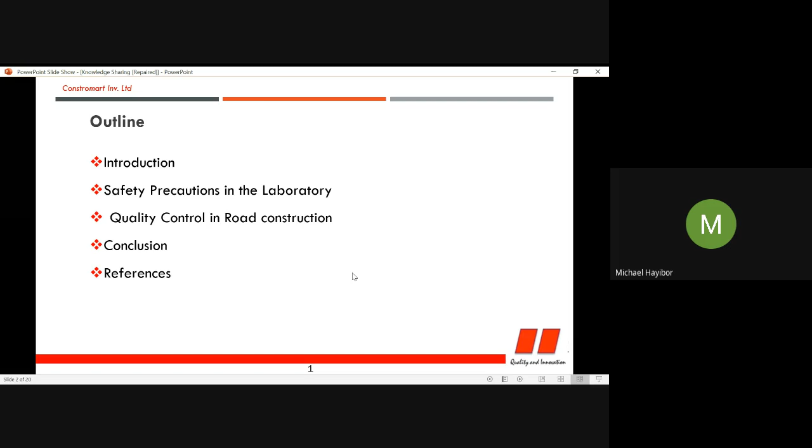Introduction. Materials are the fundamental entities of every structure constructed on site. Anything we see on site, be it culverts, concrete pipes, the GWC layer, anything that constitutes a structure or a component of the road construction, is gotten from materials. This therefore in principle suggests that if a material fails, you can rest assured that anything you are constructing on site will not last.

Therefore it is the responsibility of the lab to test and analyze materials and be sure that only standard, correct or qualified materials are used at every stage in the construction process according to laid down procedures and standards. So quality control simply means ensuring compliance with minimum standards of materials and workmanship to achieve the design performance of the road or facility, road in our case. It is therefore measures put in place to eliminate the risk of non-conforming outcomes. So if you don't want your road to fail, then you have to control, in our case, the materials.

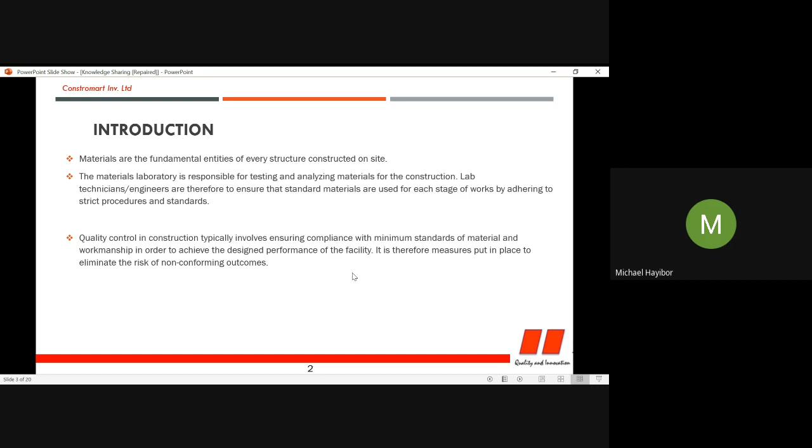So quickly, let's look at some safety precautions in the laboratory. As I said earlier on, whilst we are trying to control quality on site, if you are not healthy or if you are not fully fine, you may not be able to take good control of materials on the site. So first of all, as we are talking of control, you have to control your own safety in the lab to remain sane, to remain healthy, to perform your duties well.

So as much as we want to achieve quality, your own quality, which talks of your health here, your hands, your eyes, your legs, everything. You wouldn't want to come to the lab trying to make sure that the construction is done according to measures and procedures, but at the end you came with 10 fingers and you are going back with 7 fingers. It wouldn't be fine. Or you come and inhale, and at the end you are sick. First of all, prioritize your health so that you'll be able to function well.

So these are a few things, not limited to this, that you wear to protect yourself. Looking at this is a lab attendant in package 3 here. He has his nose mask on, he has his gloves, he has a lab coat, and then his safety boots. So this is the typical dressing of a lab attendant. At each test, you may or may not be required to use some of them, like the gloves. Some tests you may not be able to perform if you are using them.

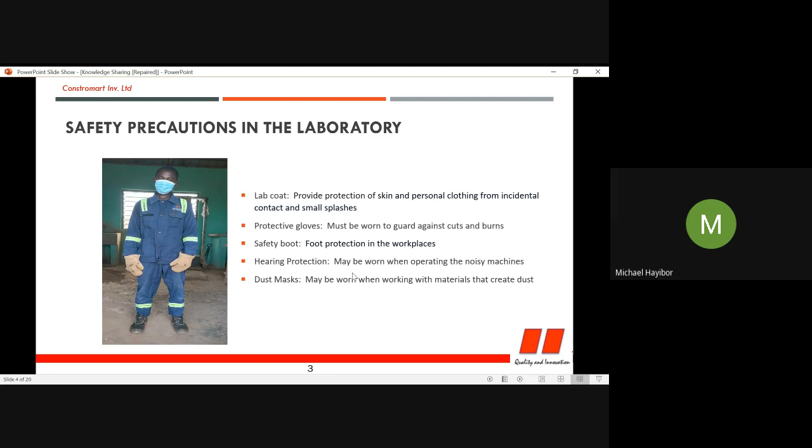Then we also have dust masks or nose masks. Some soils, you work with them, you dry them, and as you work with them, the dust generated is not good for your health. So these are a few things you use to protect yourself depending on the kind of test you do, to be able to remain relevant and do your work as a quality control personnel.

So we now look at quality control in road construction. When we talk of quality control, we can have a variety of things that you do to ensure that there's proper use of materials or proper execution of works in regard to materials, to make sure that your construction is excellent and well qualified. So we can talk of control of materials, where you look at the materials and the test procedure. Every material requires a certain test for you to give it approval to be used on the road, and that test requires a certain procedure that you have to go through.

So you also control the test procedure, how you run the test. Then you look at the frequency and extent of testing. So maybe looking at gravel, or chippings that we use for concrete, standards have been given for you on when and how to do the test. So when do you do the test, or after what amount of material has been used are you required to do another test?

And some to the frequency, then some material can lie down for a lot of time, and where you doubt its quality, you may require to do a test again to see whether it is qualified or not.

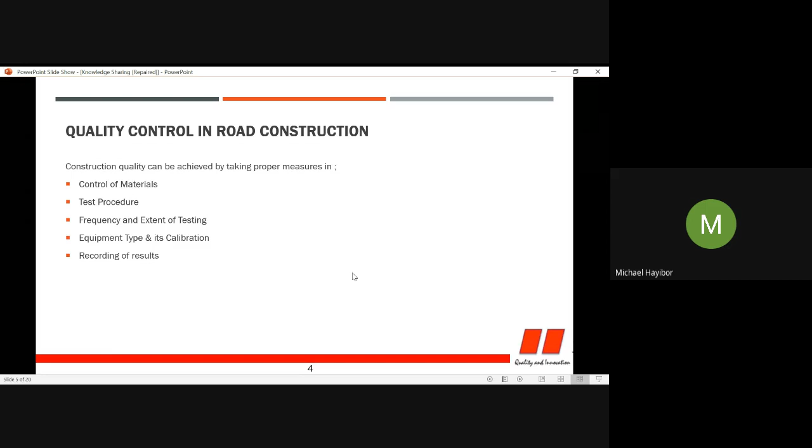So tests might be performed on individual materials. What do we control during road construction? First of all, tests can be performed on individual materials. So you can control individual materials. Tests are there that will be performed to control individual materials like soil, gravel, aggregates, or binder, or something we basically call coater. So it can be an individual material.

You have to also control mixes, gradation of aggregates. Maybe you have combined there is not a single type of aggregate, but a lot of different sizes or different shapes that you have to control, mixed proportions, mixed designs. So concrete, for example, has a lot of components. We have water, we have the sand, we have the...

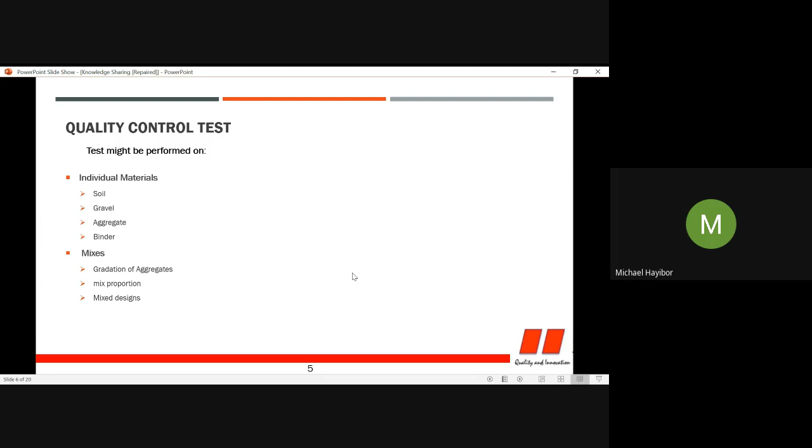to ensure construction quality. Then during construction process, you can also control spreading. Maybe those who have been able to go to package 1, the spreading of chippings after they have put the binder on the road. Looking at the amount that is supposed to be put on the road, at what rate or at what speed should the vehicle move, such that once the chippings come out of the vehicle, being spread on the road, it will be according to what is designed.

Then we also look at controlling temperature, the mixing temperature. What is the temperature, for example, of the binder or the coater? We have standards that are used to control all this. Then spraying, at what rate? Sometimes we go to the road, then we see bleeding, such that the coater or the binder is too much on the road, such that when your car passes on it, it can stick on the tires. So you have to control the spraying to ensure quality.

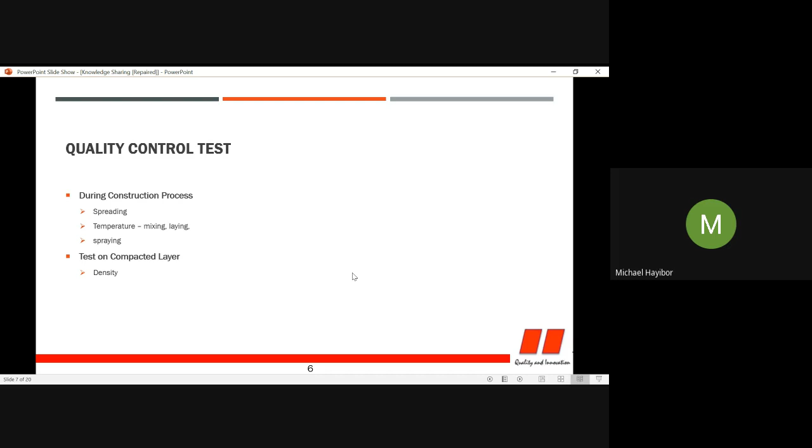Then we can also have tests that can be done on the compacted layer, maybe density, GWC. We all know borrow pit, the material that they bring to the road, they lay to a certain thickness and compact. What test can you perform on it? It is density. So we look at individual materials, we look at mixes, then we look at control during construction process. Then after construction, the compacted layer can also be tested.

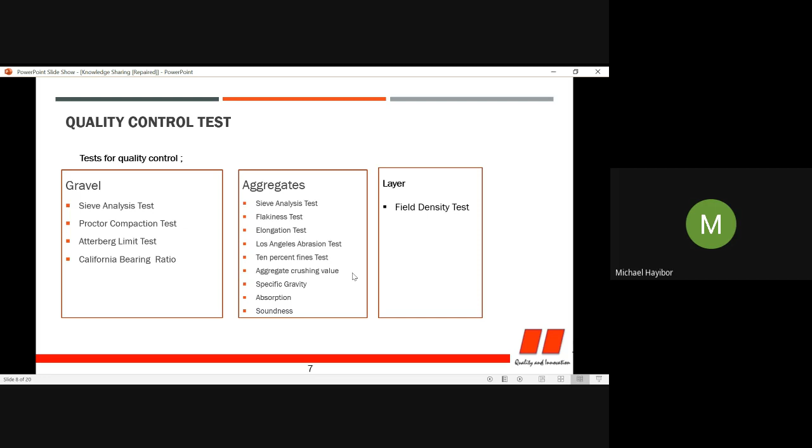So tests for quality control. These are some of the few tests that can be performed on materials on site or in the lab. These are not exhaustive, just a few I have taken for this presentation. So for gravel, we can do sieve analysis test, Proctor compaction test, Atterberg limit test, California bearing ratio. Also with the aggregates, we have this kind of test, then the field density test to see whether it has qualified or not. As we go through, we will look at a few of them and the equipment being used.

So looking at sieve analysis test, the standard that we use to control proper use of materials on site gives us values. When we talk of standards here, mostly what we use to control works or materials on site is basically values. They are limits, maybe let's say 1 to 2 or 2 to 3 and all those things. So we have standards.

In the case of sieve analysis, it is done to determine the particle size distribution of the material. So when you are going to use it for a certain material, you have a standard for it to pass or for you to use it at this stage or for this purpose.

You have a standard that is being used for the gradation or for the sieve analysis. So we use sieves, the equipment, for those processes to perform that test. We have the sieves that we are seeing in the picture. We have the one with the largest aperture at the top, and then the one with the lowest at the bottom.

So you put your material in the upper one, then beside it is the shaker. Using this one, you'll be able to shake it, and then you calculate with standards to see the gradation, how distributed are the materials that you want to use, and you compare with whatever purpose to approve or disapprove the material for use to control your quality.

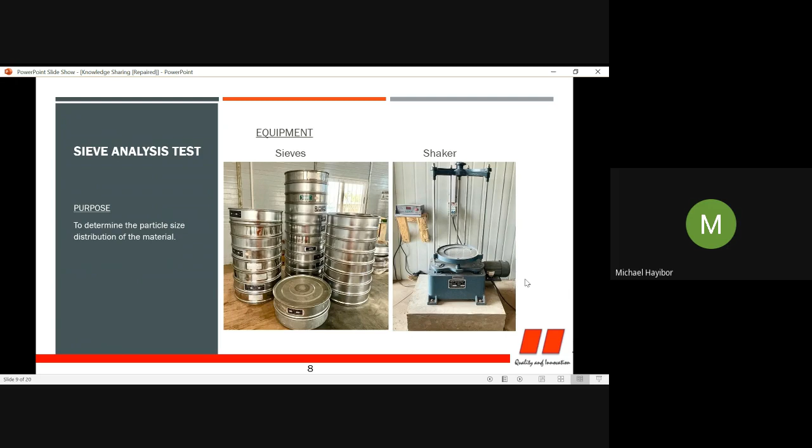So mostly for the next tests that we'll be doing, what we know is that we use standards, and basically they are values. So you do the test, compare with the values or the standards. If it is not qualified, you reject the material. Or if it is not qualified, you look at a different way to solve it, to control your construction on site. So next test is Proctor compaction test.

So this is done to determine optimum moisture content and maximum dry density of the material. We all know that when we talk of moisture content, we are looking at the amount of water in the soil or in the material, in the gravel. So using borrow pit, for example, when you bring it to site, there's a certain level of water that you have to put in the soil so that you'll be able to compact it to a very dense state.

So the Proctor compaction test with calculation will help you determine what amount of water should I add on these materials such that I'll be able to compact it very well. So some materials need very little water, whilst some need a very large amount of water. So when you do this test, you can tell control on site for this material, add more water so that you compact it well, or add little water so that you can compact it well.

And then you look at what is the maximum density that is possible to obtain in the lab, so that you can use it during your field density test to control whether they have compacted it well or not. So the machine here, we have a mechanical one that you can use for compaction. This one helps you to compact your material in different amounts of water, after which you'll be able to determine the optimum one, the one that will give you the best density.

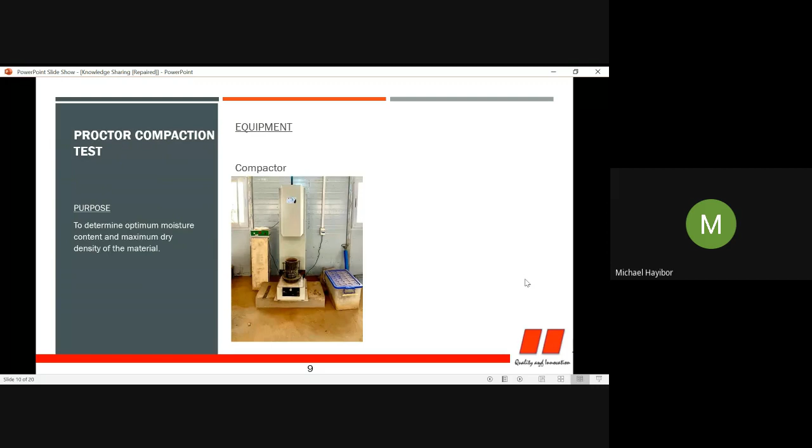So this one is from package 1 at lot 1, sorry. But in package 3 here, where you don't have this machine, you have to compact the material manually. Then we also have the California bearing ratio. So this also determines the strength characteristics of the material. So this is just an extended test on the compaction.

So after you got your amount of water that you need to make a better compaction on site, then you proceed to look at the strength after you have compacted it. California bearing ratio gives you a clue about the strength. So depending on the kind of material you are using, it has a certain minimum strength that it has to meet. Let's say we want a certain strength, say 40. So you use this machine, the California bearing ratio machine, to perform your test and then calculate your strength.

So if you're looking for strength 40, then it means that for your material you should get the minimum strength to be 40. So after going through this test, you are trying to get the strength. So if you're looking for strength 40, you have to get 40 and above. And if it is less than 40, then you will not be able to use that material.

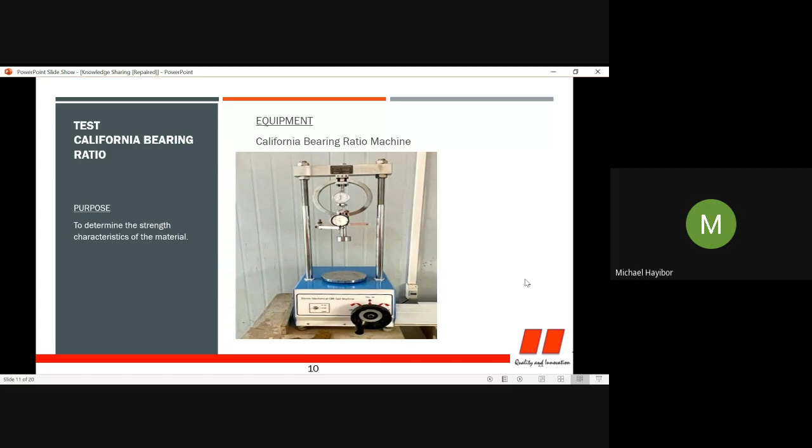Then we also look at Atterberg limits test. So this one determines the liquid limit, plastic limit, and plasticity index. These are all standards in the specifications that we are using. So the liquid limit just talks of the amount of water that you add. This one, you have to use the fine part of the material, borrow pit material.

To determine the liquid limit you use the Casagrande. So it tells us the amount of water that we can add to the fines or to the soil, such that it will just begin to flow as a liquid. And then the plastic limit is also there.

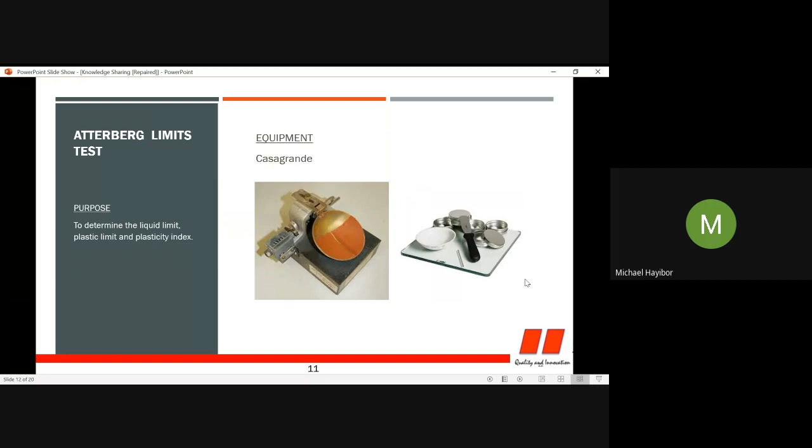And then with the help of the liquid limit and plastic limit, you'll be able to calculate your plasticity index and compare it with standards. You'll be able to know whether or not the material is good to be used on the road.

So we also look at flakiness. So this one measures the strength of aggregates, or chippings, the aggregates that we use in concrete, or let's say basically the stones that we use in concrete. So this gives you an understanding using this flakiness gauge. Also, the standards are there after you have gone through your test, then you compare to see whether to approve

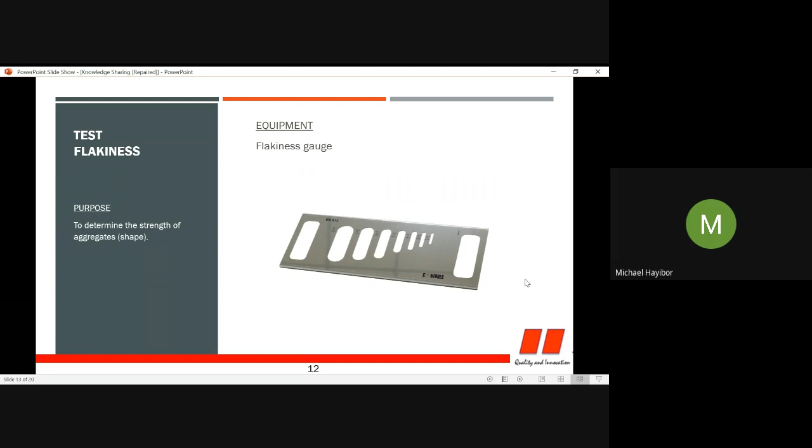or disapprove. So with the flakiness gauge, you try according to the standard to see whether the material will be able to pass through these apertures or not, after which you determine whether it's flaky or not. So if it passes to be used on the road, it's not flaky. But if it doesn't pass, then you say that it's flaky. And flaky materials are not strong and not durable for use on the road. So this flakiness test is used to determine the strength of the material or the shape and size of the material.

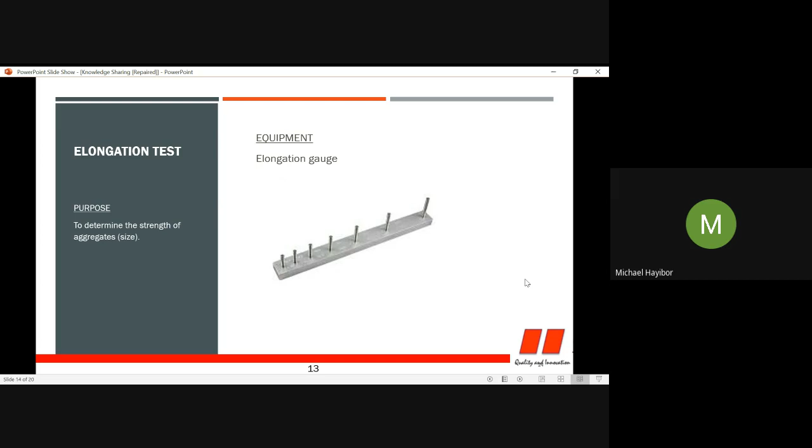We also have elongation, which goes with the flakiness test. Looking at the size, or let's say how long each particle of aggregate that you are using is. You do that, also get your values and compare with standards to know whether to approve it or not.

And we also have the Los Angeles abrasion test. So that one is done to determine the strength of the materials. Also, you are looking at durability or hardness of the material, the ability of the material to resist load or crushing and all that. So this is the LAA machine, or if you want, Los Angeles abrasion machine. This is the machine with the balls here.

You put the material in the machine and then put the balls in it. After a number of revolutions, you will be able to calculate the wear on the material and compare with your standards to control the use of aggregates on site.

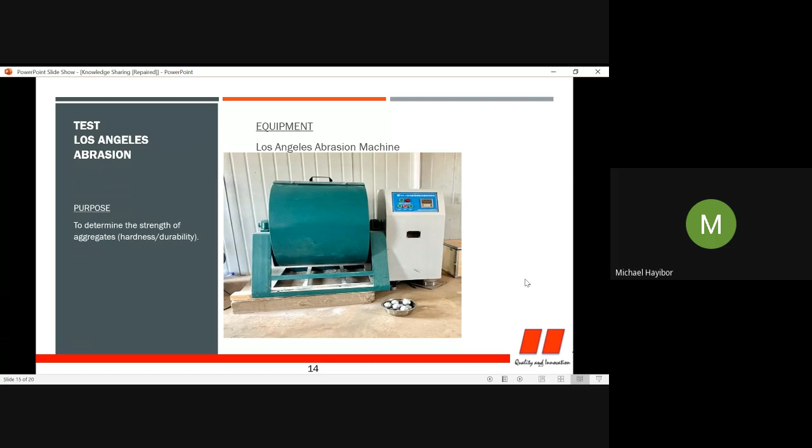Then we also have compressive strength tests. So this tests the performance characteristics of a mixture. So let's take concrete, for example. So if they are casting concrete on site, you take samples with the help of moulds. You take samples and for their specified days, like 7 days and then 28 days, you crush the samples using

this one. So let's say they are constructing U-drains, for example, so as they have started constructing, you take samples. After 7 days, you crush it. You have a certain percentage, say 60%. By 7 days time, the concrete will achieve a certain level of strength. So 60% of the target strength that you are looking for. So let's say you are looking for a strength of 25 Newton per millimeter square. Then you are crushing it to check whether you are getting the required strength or not.

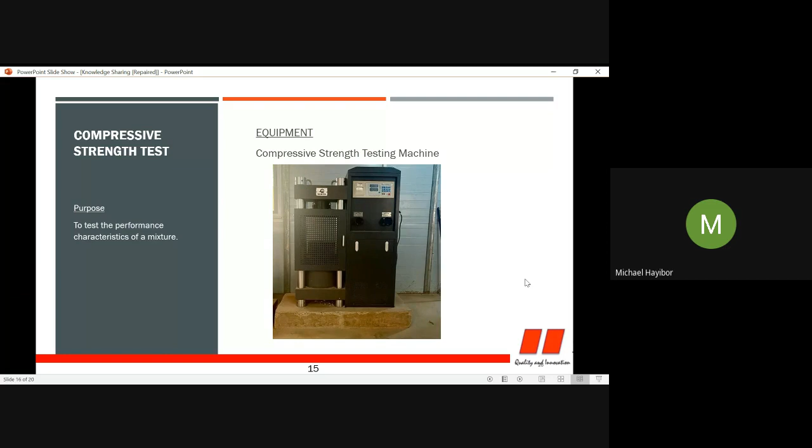If you are getting the required strength, or if it is more than the required strength, very good, they can continue with what they are doing. But if you are getting less than what is required, then you have to prompt them. Maybe you have to go and see what they are doing wrong and correct them, so that you bring them back to the right process.

Then we also have field density tests that we do on a compacted layer. So maybe they have laid a sub base or a base, and you want to see, has the roller passed on the layer enough? Maybe the roller has passed on it 5 times, 6 times. So you want to check, has it passed on it enough? Have we achieved our maximum strength as we did in the lab?

So you compare the results that you have here with that which is achievable in the lab to see the relative compaction achieved in the field. So you also have standards depending on the layer that you are constructing. Some of them, you may have to achieve a certain level, say 93%. Some you may have to achieve 95%. Some you may have to achieve 98% of what you got from the lab. If you get less according to the layer that you are doing, then you have to tell the roller to pass through again. You have to compact again.

Or if maybe, like we checked earlier, the water that you added wasn't enough, then you have to add water again and compact very well until we are able to get a good relative compaction before you can say that the layer has been compacted well.

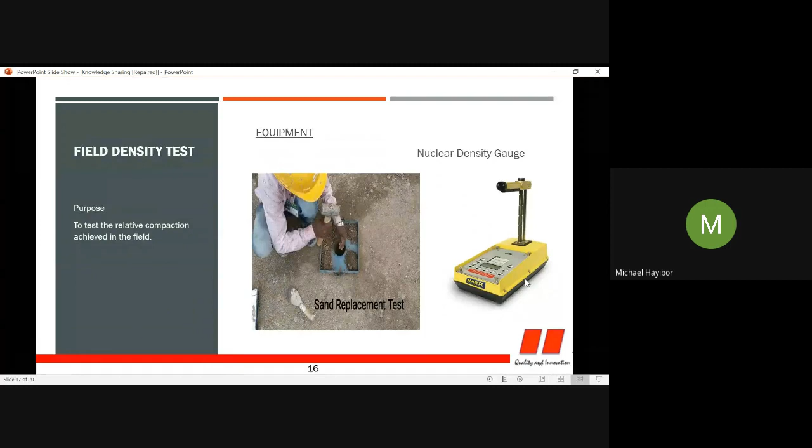But we also have the nuclear density gauge. The technology has advanced such that you can put this one on the layer. It can measure the amount of water in the layer. It can measure the compaction in the layer. Then after which you can proceed to get your relative compaction to know whether or not the compaction was enough.

So in conclusion, we need adequate equipment, adequately trained staff and on-job training that will work collectively to ensure proper quality control and enhance construction quality. In all this that we have spoken about, which is just a section of things done in the lab to control quality on site, you need adequate equipment. If you don't have adequate equipment, we would not be able to achieve all this we have spoken of.

You also need adequately trained staff. Maybe your staff may be trained, but they are not enough. Some of the tests, like the field density test, one person cannot perform it. So if you don't have enough staff to perform it, it may be impossible for you to control works on site.

So as an example, if you go to Yendi, package 1, both lot 1 and 2, although they may also be lacking, they have a good number of staff or workers that are always on the road performing densities to know whether the compaction was okay or not, so that they will lay the next layer on the previous layer.

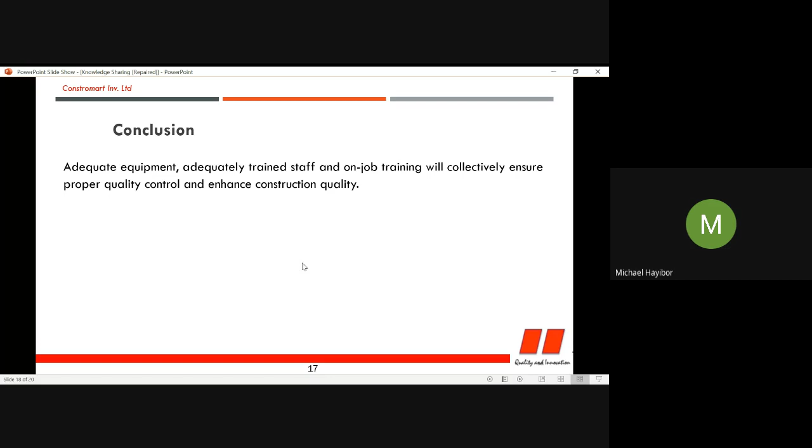Thank you, Emmanuel. Isaac, please, has the question been answered? Yes, please. Thank you. Engineer Melomey, please, you can ask the question. Okay, thank you very much. Good morning, everyone. Emmanuel, thank you for your presentation.

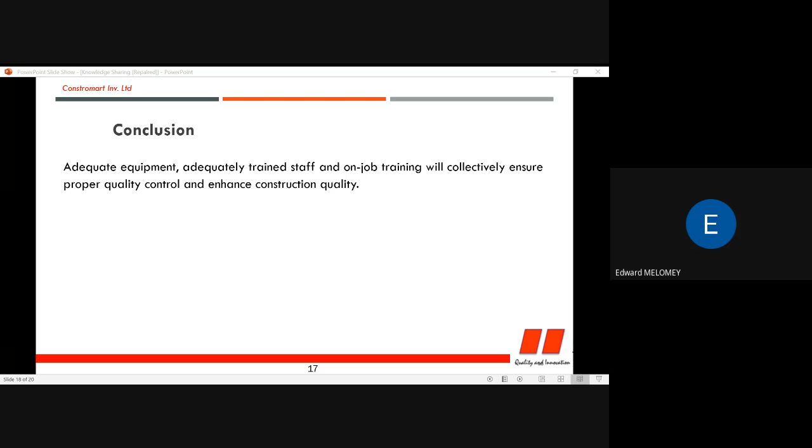Just a quick one. From Isaac's input, and generally through the presentation, we've been using the expression failed, material failed, or test failed. We cannot say that it has failed in engineering communication, because every material is usable, except that it may not be suitable for the purpose you desire. So when the material is not suitable for your purpose, it means that it did not meet your standard and specification.

I'm emphasizing these articles primarily because it could meet the standard for use as a material, but it may not meet what is specific to your project. Am I communicating well? Yes, sir. It's just a piece of information to clarify our use of the terminology. So if we say it has failed, it may not be a good description of the situation that we have, because that supports Emmanuel's point of view

that when materials become unsuitable, there may be ways of improving on them to meet the standard and specification for the project. Sometimes the standard may be all you have, with no further specification, or you will have standard and specification. I'm emphasizing this because standards typically belong to the body of documentation that is basic to the practice, so everywhere they are accepted general codes.

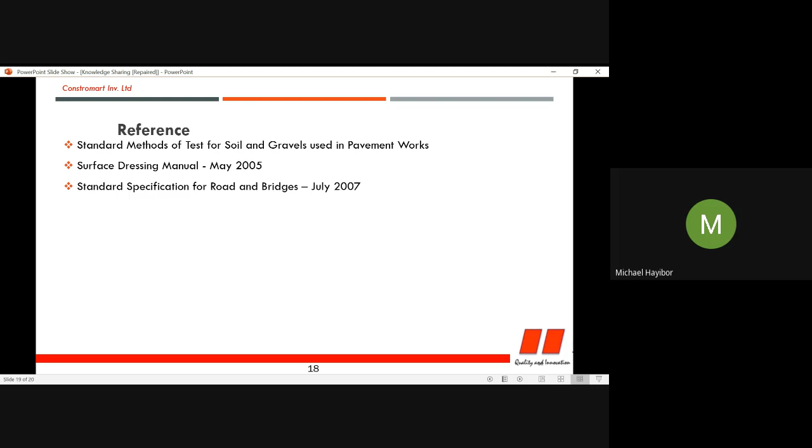Thank you, sir. So yes, Mr. Komina, did you want to make an input? Yes, please. Okay. Good morning.

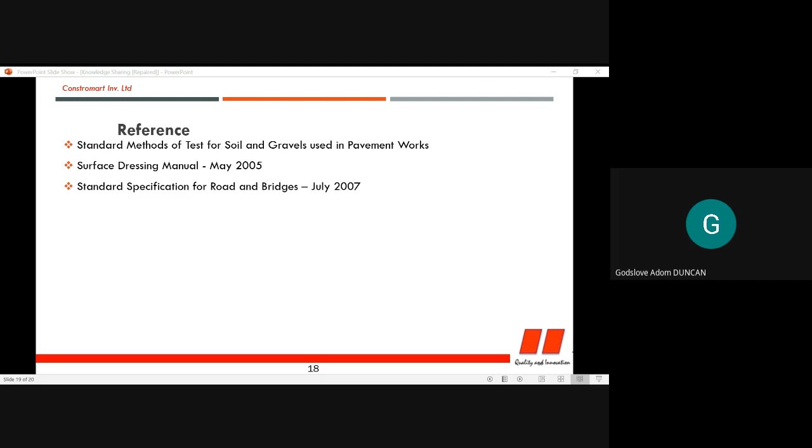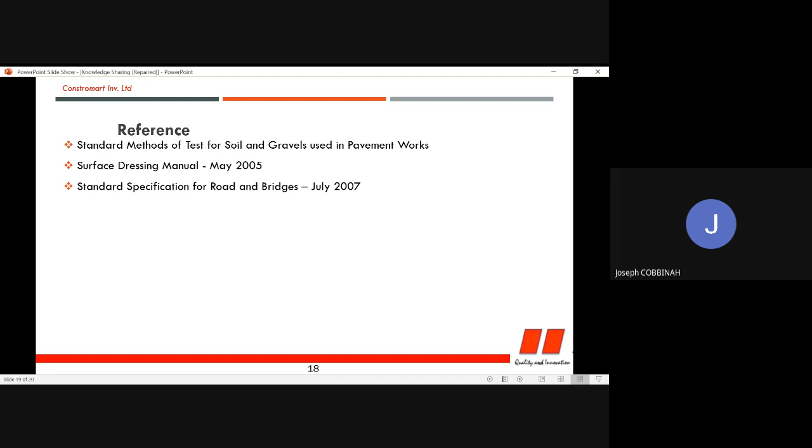Good morning. Okay, when it comes to roads in Ghana, the specification that you use is the standard specification for roads and bridges. That's from the Ministry of Roads and Transportation. But aside from that, most projects have a special specification. So if there is any contrary view between the standard specification and the special specification, we stick to the special specification because that specification is basically designed for that project. Thank you.

Thank you very much, Joseph. So that answers the topic about the regulatory standards we are referring to and who oversees them. The overall umbrella of all this is the Ministry of Roads and Highways, or the Ministry of Roads and Transportation. Under that we have the Ghana Highway Authority, who generally oversee all of these certifications. But we also have the role of the Department of Urban Roads and the Department of Feeder Roads. So all of these agencies are important when it comes to the regulation of the practices of road construction.